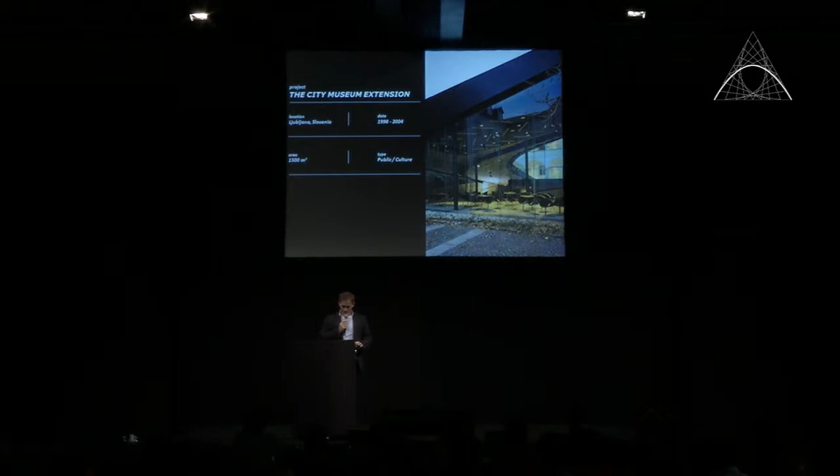The first 3 competitions that we won were the City Museum extension and renovation in the capital of Slovenia, the football stadium Maribor for the football club Maribor, and the social housing Lakeside Apartments, also in Ljubljana, near the Rožnik hill.

10 years after Slovenian independence came a golden era in which we managed to design and build numerous social and commercial housing, such as Honeycomb Apartments on the seaside of Slovenia in 2003. Just 1 year later, we started with 650 Apartments located in Ljubljana, near the old center of the city.

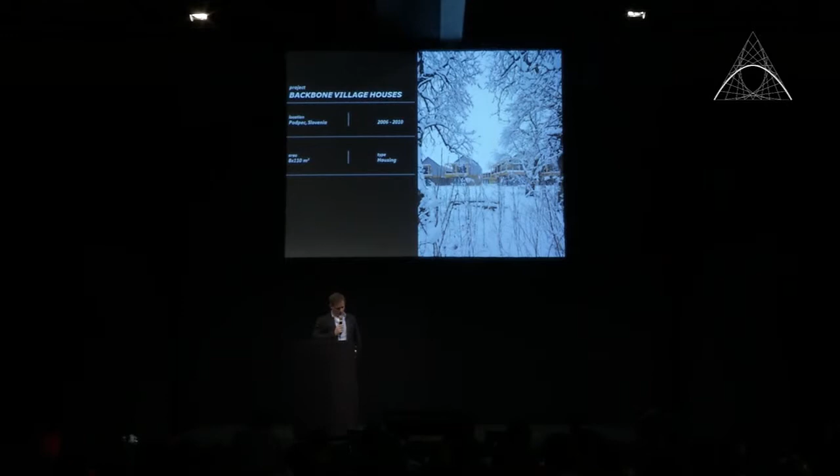In 2005 came the project Tetris Apartments, also located in Ljubljana, close to the project 650 Apartments. Commercial housing called Lace Apartments in Nova Gorica on the border with Italy. And in 2006, we started to design smaller scale housing, a project named Backbone Village Houses, located in Podpeč.

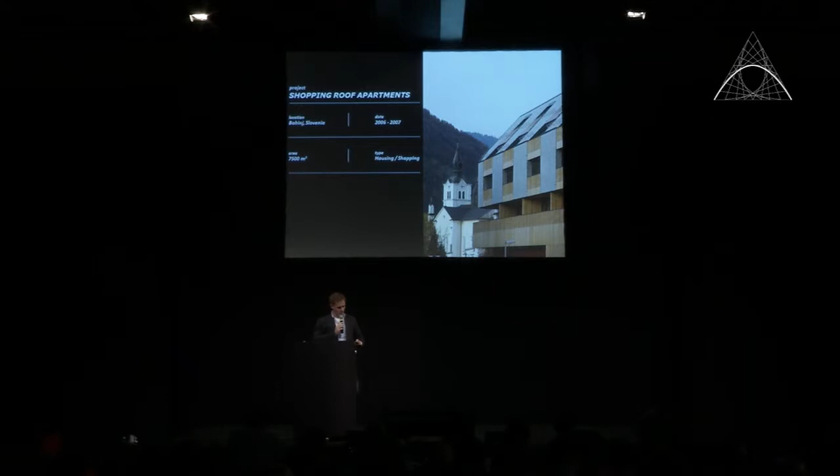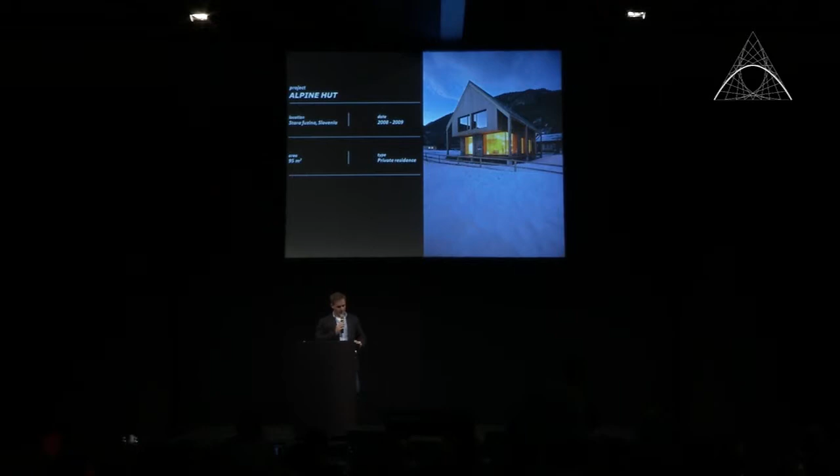In the same year, we also began the project Shopping Roof Apartments in Bohinj, near the Triglav National Park of Slovenia. After that came the Herek Apartments built in Cerklje, Ski Alpine Apartments in Kranjska Gora. And during that time we also designed and built a few houses of different scales for different private investors, such as Alpine Hut, located near Lake Bohinj.

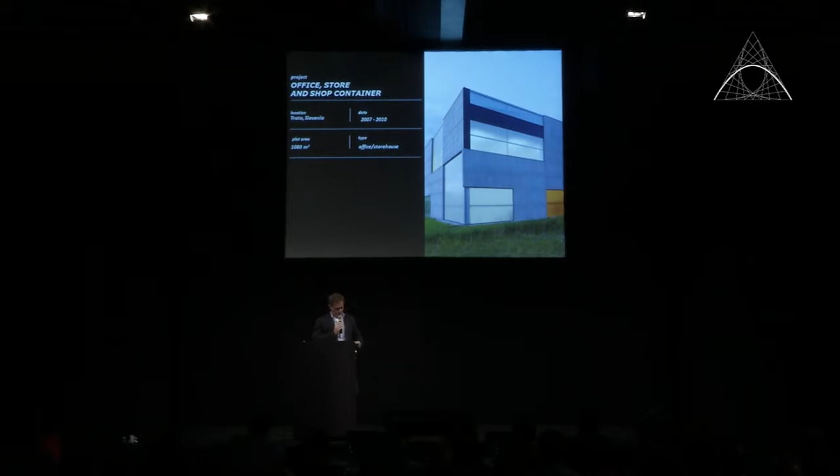And the bigger scale villa called Villa Under Extension. The location is in Bled. And another villa in Ljubljana called Villa Old Oaks. I would also like to present the storage house, container and shop offices in Škofja Loka. And then the 2 cultural projects. The smaller one, Farewell Chapel, located in Krašna, Slovenia.

And Cultural Center of European Space Technologies, KSEVT, named Habitable Spaceville, which was also special because we designed it with another 3 architectural studios from Slovenia: Bevk Perović, Dekleva Gregorić, and Sadar plus Vuga architects.

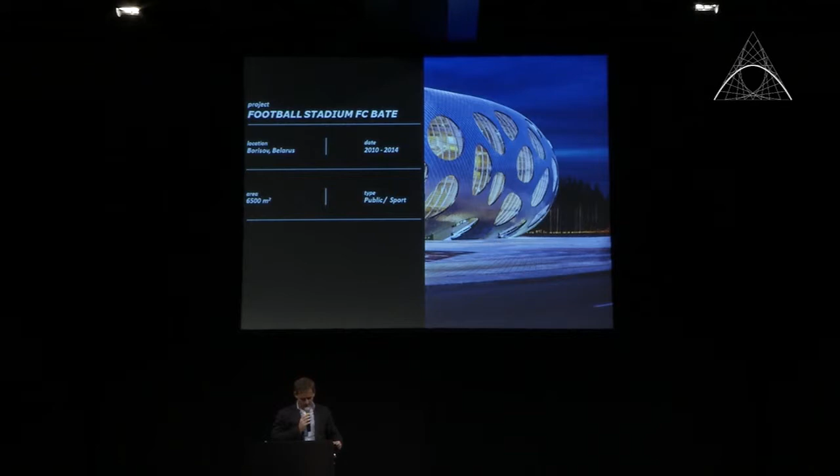And recently we finished the football stadium built for club BATE in the city of Borisov in Belarus. The stadium, just a little bit of information, has almost 14,000 seats. It is classified as 4 stars according to UEFA categorization.

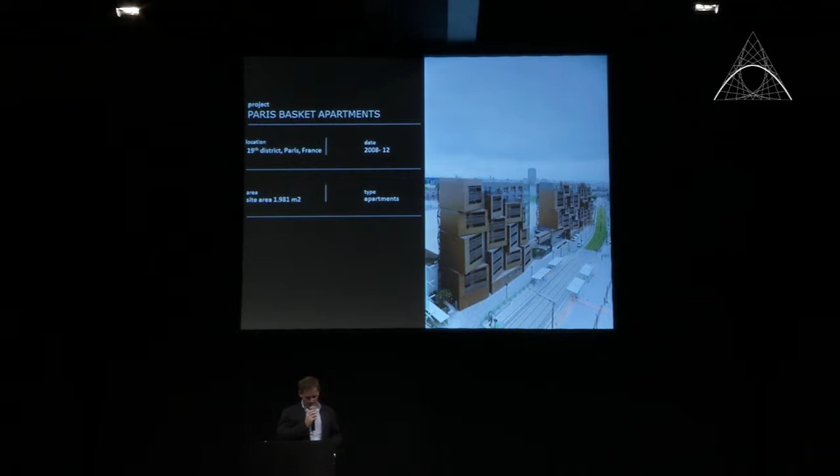And to finish, I will present in a more detailed way the project which you have all probably seen on the website of Archmarathon, Basket Apartments in Paris. The project started with a competition in 2008 and it was finished in 2012. It is located in Paris, on the edge of the Parc de la Villette in the 19th district. You can see the park on the left.

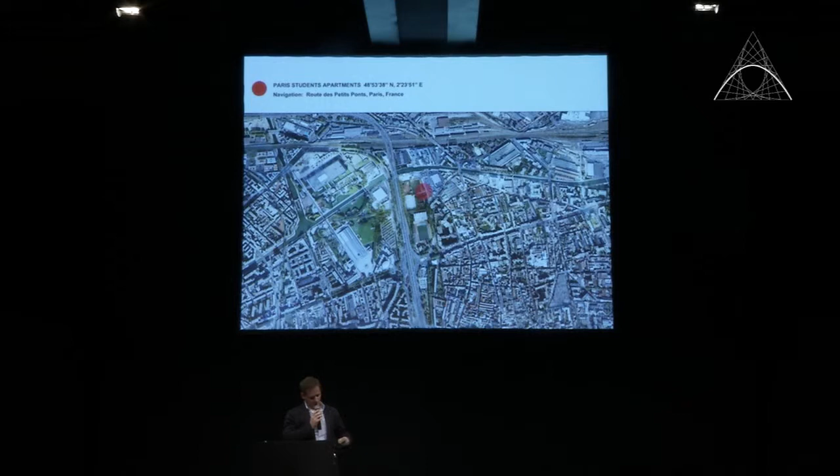The brief of the competition was based on the urban development done by Reichen and Robert architects. The given plot was divided into 2 volumes, and as you can see, the parcel has a very particular configuration. It is just 11 meters wide and almost 200 meters long.

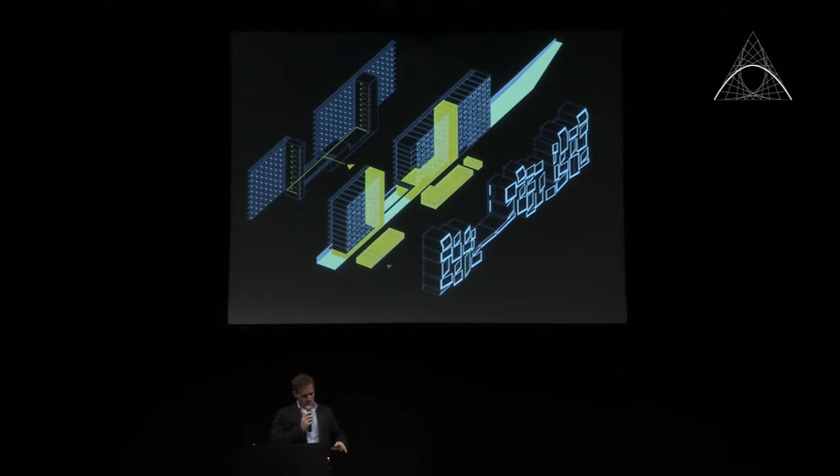In this diagram, we can see the communication shafts. Each volume has 1 shaft for communication, and on the ground floor there is a common area, which we can see here. And we managed to put 184 studios with all the supporting program. All the studios have their entrances facing the elevation towards the football field. This is on the left side. On the right is the front facade.

We designed 2 types of elevations. On the left, we can see the 3D metal mesh looking towards the football field, and on the right is the front elevation looking towards the street, the Petits Ponts, and the tram. This is the programmatic scheme of the building. All the common spaces, as I said, are on the ground floor.

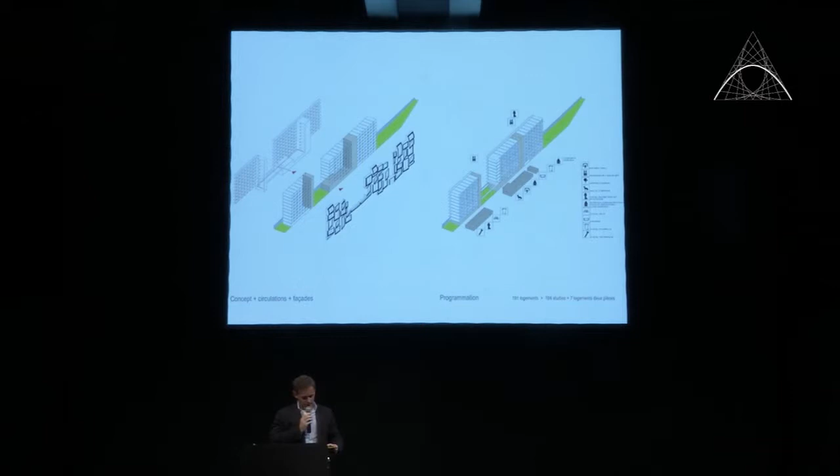If I start with the smaller volume, at the beginning there is a technical room, storage room, space for bicycles, garbage room, and there is the garden separating these 2 volumes and also connecting them on the ground floor. After the garden is the community hall for all the students to relax, to read, to talk. Then there is the main entrance with the guardian and lockers for the students. Offices for administration, laundry, garbage room, apartments for the guardian, and a garden at the end, also for the students.

With the following pictures, I will try to explain the concept of the elevations, starting with the elevation towards the street, the front facade. As you can see, the urban plot was already given by the brief. Then we have the openings. We are starting to combine them into groups of 2, 4, and 6. And then finally, we have the baskets connecting everything together.

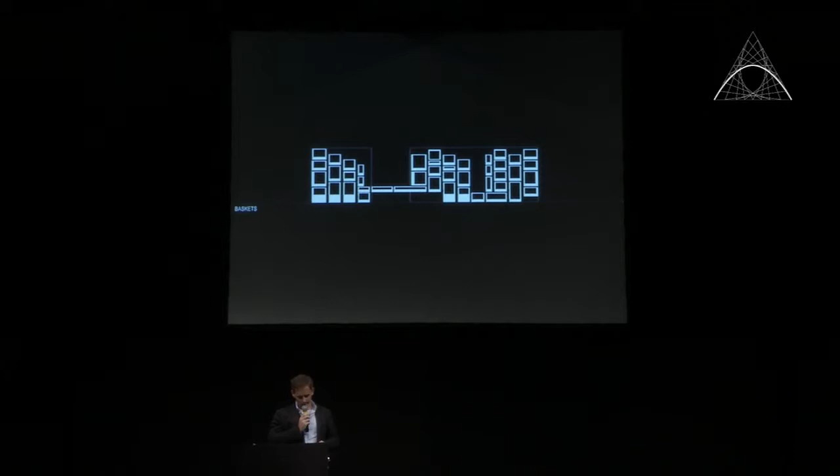And here we can see the elevation towards the street, the Petits Ponts, which contains studio balconies, baskets of different sizes. They are made from HPL, high pressure laminate stripes. They are also randomly oriented to diversify the views and rhythm of the elevation. Shifted baskets create a dynamic surface while also breaking down the scale and proportion of the building. This we will see in other images.

And both volumes are connected on the 2nd floor with a bridge, which is also a common space for the students. And now we will go to the back facade. The football field, again, the given urban plot. Then we have the open corridors, the combining, and finally the meshwork.

The back elevation has an open passage walkway with studio entrances enclosed with a 3D metal mesh, which also has the function to prevent students from throwing things on the field.

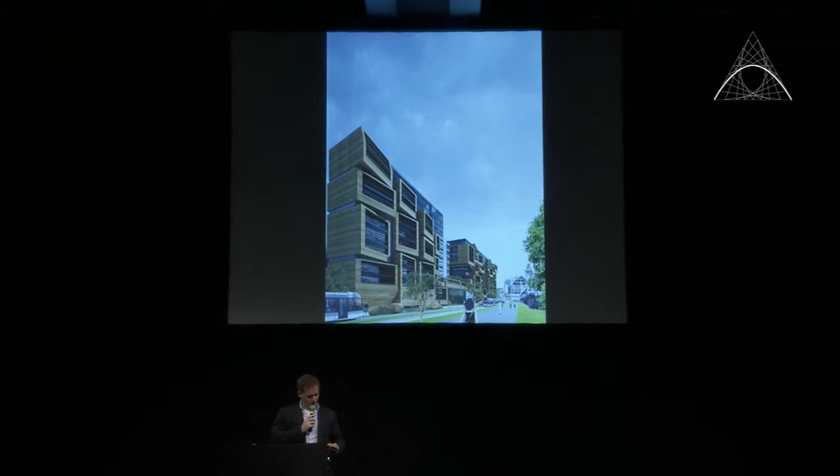Okay, now I would also like to present the submitted material for the competition. I will start with some renders. This is the first view from the street of the front facade, the opposite view, the close-up where we can see the bridge connecting the second floors, the model, the elevations,

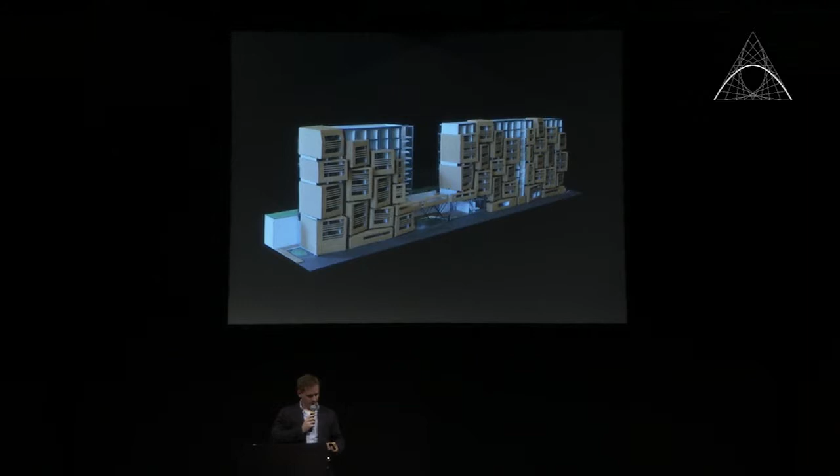the situation in the ground floor, where we can see more detailed organization of the ground floor. From the left again is the technical storage rooms, bicycles, garbage. In the middle there is a garden connecting, and then we have the whole entrance, guardian, lockers, technical room, garbage, and in the competition there were also some studios. But at the end, we didn't put them into the ground floor because just in the middle of the planning, the law in France changed.

Okay. So as I was saying, in the competition there were also some studios on the ground floor. But at the end we didn't build them, because during the planning the French law was changed, so we needed to make all the rooms so that the handicapped can use them. So all 184 rooms are actually done also for the handicapped.

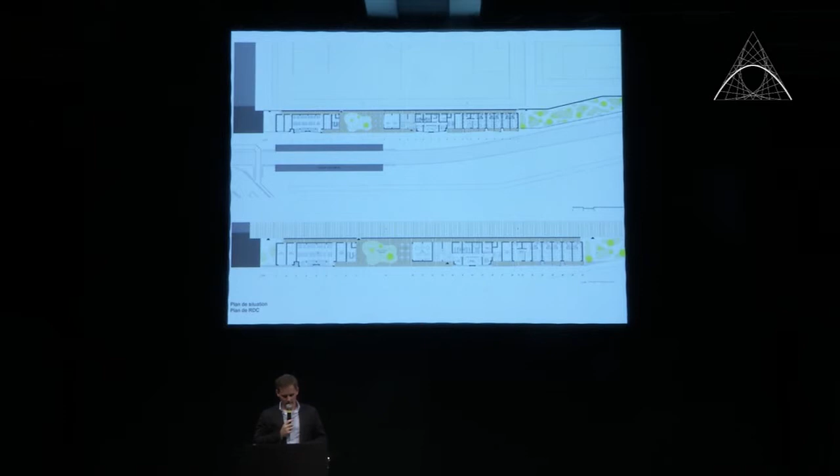Here we can see the plans. In the first floor we can see the narrow bridge connecting these two volumes, and on the second floor there is the main bridge, which is also visible from the street, which also connects the rhythm of the facade. And then from the third till the ninth floor, they're completely the same, but just the balconies have different orientations.

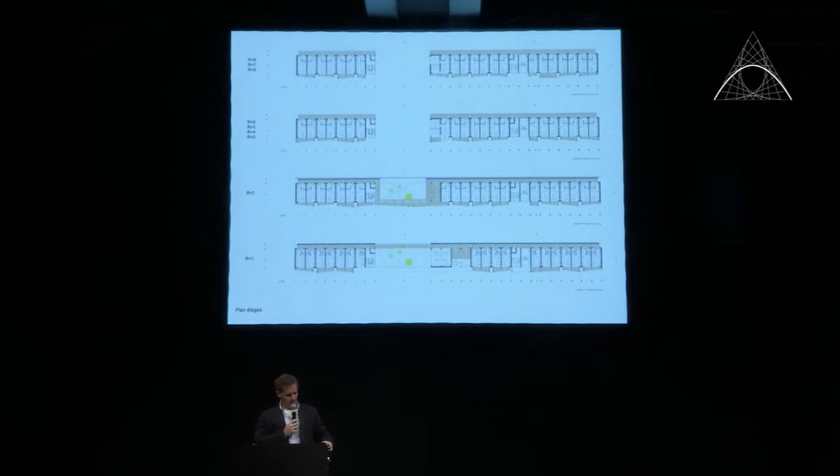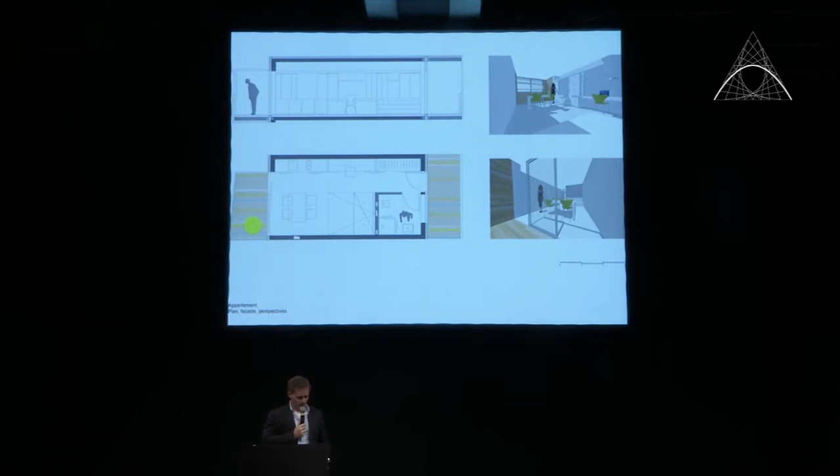Here we will see the apartments in a more detailed way. All the studios are the same size and contain the same elements to optimize design and construction. They have the entrance, bathroom on the left, the wardrobe, the working space for the students, the kitchenette, and the bed. And also every apartment has a balcony overlooking the street.